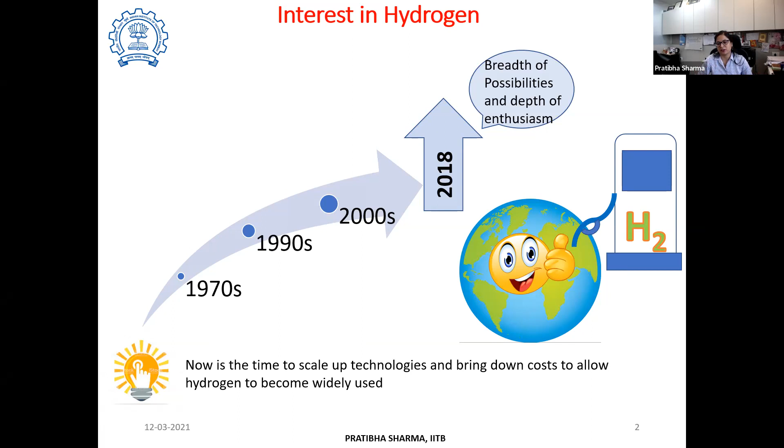Now, if we quickly see some of the major initiatives that are there, there are several roadmaps, strategy documents, mission documents which various countries are coming up with. And we know many of these, like Germany's world's first fuel cell train, this was in news, and now they are coming up with a few more trains.

China has a target of 1 million FCEVs by 2030 and 1,000 hydrogen refueling stations. They are planning to have a hydrogen energy industrial park with an area of 130,000 square meters. Japan has launched their hydrogen mobility program.

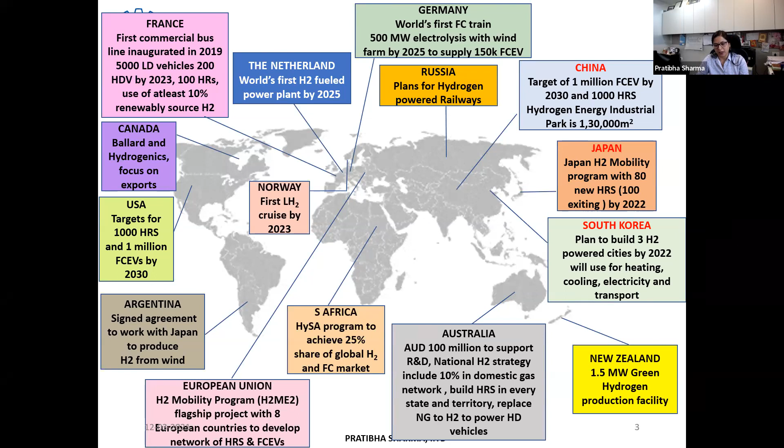Similarly, there are several countries, including India, who are coming up with their strategic documents. These documents have certain targets defined, considering that by 2050 or 2060, depending upon which country has announced which year they want to reach net zero target. All these factors are increasing that interest.

There are different countries which have their hydrogen missions, to name a few: Japan, China, US, Australia, Germany, France. They have all come up with a strategic document. There is the automotive industry, OEMs, various OEMs which have come up with various

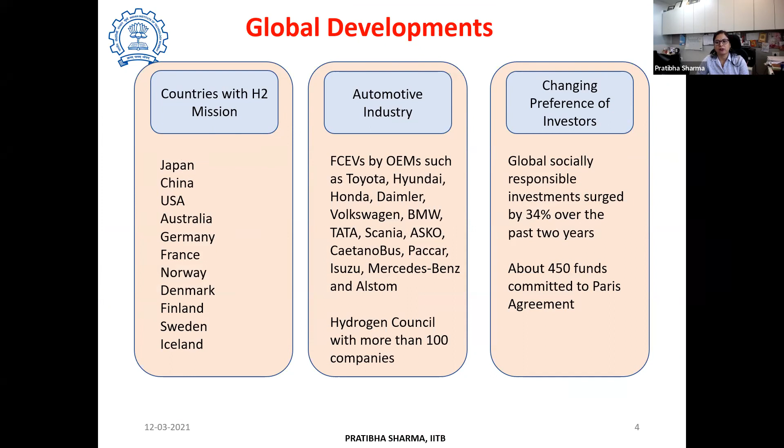prototypes, designs, various vehicles into the market. There are different councils which are formed where companies are partnering and bringing in funds. So there is an investor interest as well, which is coming up globally.

So if we see globally, there are incentives which are given so as to meet these targets. There are targets which have been launched without incentives, and then there are both. As well as there are incentives which are without targets. Depending upon the advancement scale of a hydrogen technology, these have been defined.

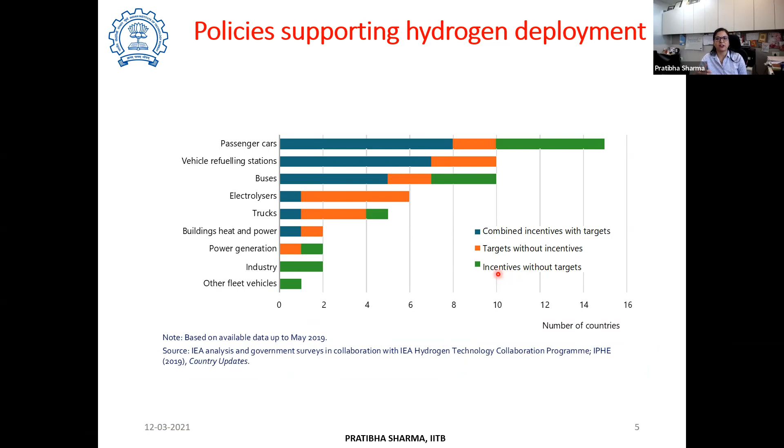Now let us first understand why this interest is coming globally for use of hydrogen. Some very simple things that we all know, I will just reiterate: hydrogen, since it is very abundant as against other fuels which we know will deplete at some point in time. But hydrogen, since it can be produced from a wide variety of fuels and sources, may sustain over a longer period of time.

At the same time, it has very high energy density. At the point of usage, it is clean and green. It even offers to decarbonize a wide variety of sectors, including the industrial sector, the transport sector, and polluting sectors like chemical, iron and steel, which are also opting for hydrogen, including a certain percentage of hydrogen in their usage so that they can reduce their carbon dioxide emissions.

Hydrogen is a versatile fuel, a versatile energy carrier, because we can use any source of energy to produce hydrogen. And that can help us with energy security.

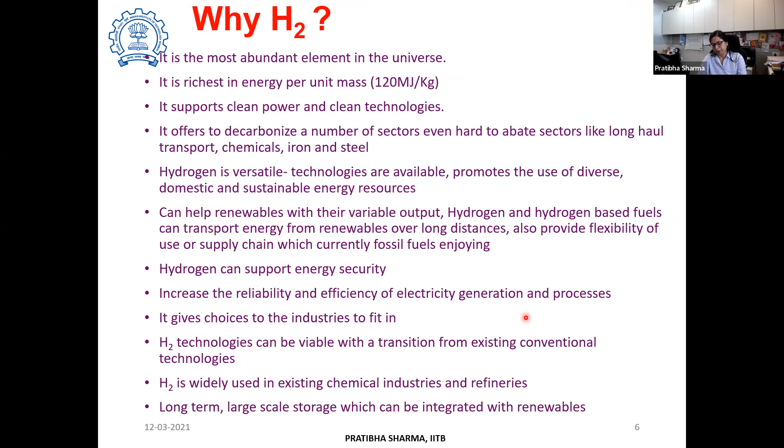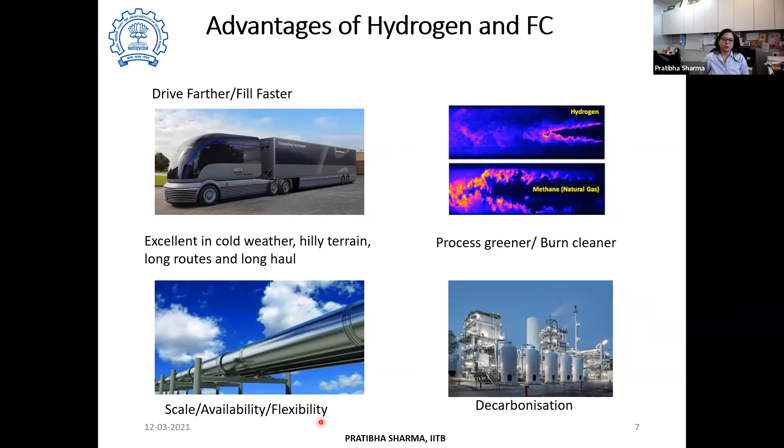When we use hydrogen, there are several advantages. In transportation, we can drive longer with hydrogen compared to battery electric vehicles, and filling could be faster. When used in different processes, whether combustion or burning, it is clean and green. We can scale it up easier compared to even battery systems. And when used, we can decarbonize several industrial sectors.

There are a wide number of applications where hydrogen can be used. It can be used for power generation, domestic applications, various industrial applications, vehicular application, navigation, and space applications. Many of these we have already been using.

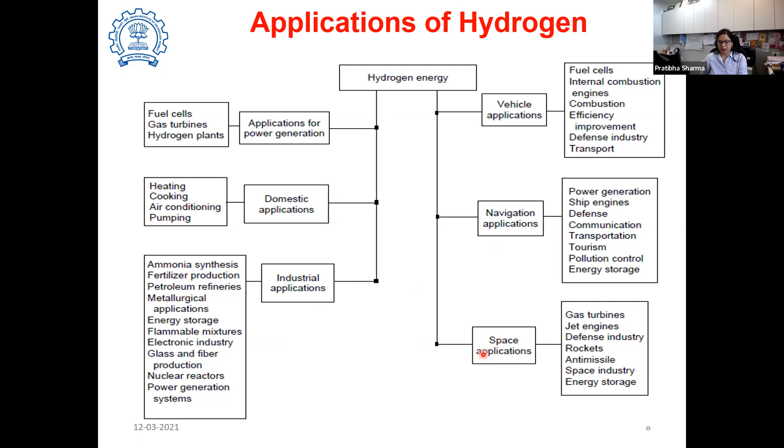Now let us come to the topic I will be discussing in this talk: the status of hydrogen production globally. About 90 million tons of hydrogen is being produced globally. Out of that, about 79%, 72 million tons, is produced in dedicated hydrogen production plants, meaning hydrogen is the primary product. The remaining 21%, 18 million tons, is obtained as a byproduct. An example of byproduct hydrogen is in the chlor-alkali industry, where electrolysis is done to produce NaOH and hydrogen is obtained as a byproduct.

Out of that 90 million tons, if we see from which fuel hydrogen is being produced, the dominating fuel is natural gas. Natural gas's major constituent is methane, but there can be other components like ethane, propane, butane, H2S, carbon dioxide, nitrogen, and other constituents as well.

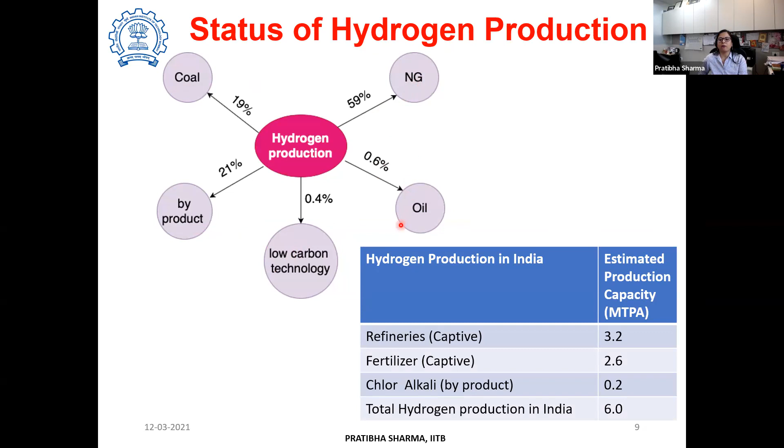Now, we have seen that hydrogen can be produced from different fuels. Based on which fuel it is produced from, there is a color coding assigned. Hydrogen itself has no color—it is colorless, odorless, tasteless gas. Just to identify from which feedstock hydrogen is being produced, a color has been assigned.

If produced from bituminous coal, it is black. If produced from lignite, it is brown, without CCUS. If produced from natural gas, it is gray. If produced from renewables, it is green. If produced from fossil fuels with carbon capture, use, and sequestration integrated, it is blue hydrogen. A new color, turquoise, is when hydrogen is produced from methane pyrolysis. There are several other colors coming up, whether produced from biomass or nuclear, but they have still not been finalized. So an entire spectrum of colors will soon come up.

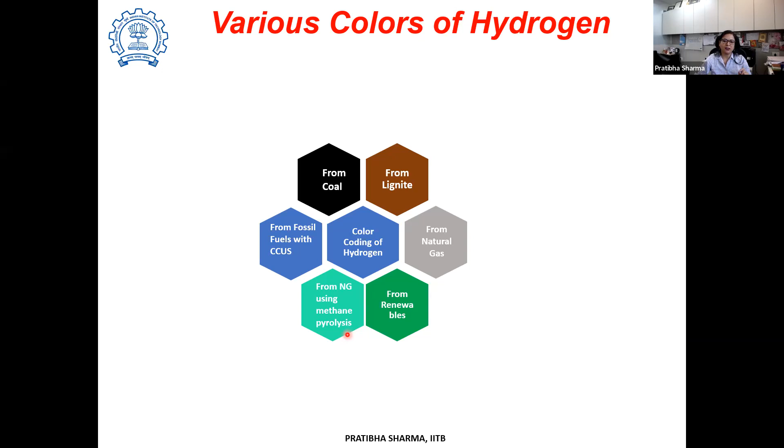So we will quickly see what are these methods, the ways in which we can produce hydrogen from these feedstocks.

As I mentioned, of the 90 million tons of hydrogen produced globally, 72 million tons is pure hydrogen and 18 million tons is mixed hydrogen. The 72 million tons of pure hydrogen is used for the fertilizer industry and refineries. The other 18 million tons is used for methanol production and DRI, direct reduction of iron, in the steel industry. So this is about the demand.

Now, why are we using fossil fuels for hydrogen production? There are very clear-cut reasons for it. Although we say hydrogen is a green energy carrier, we need to understand that if we are producing it from fossil fuels, we are still emitting emissions, and only at the utilization point is it clean and green.

But the scenario is changing, and now the focus is shifting towards green hydrogen, wherein we use renewables for production. So there will be a short term where we still depend upon fossil fuel, an intermediate term where both fossil fuel and greener hydrogen production from renewables take up, and finally, in the long term, it is expected to be from renewables only, or from fossil fuels with CCUS, so that the entire hydrogen value chain becomes clean and green.

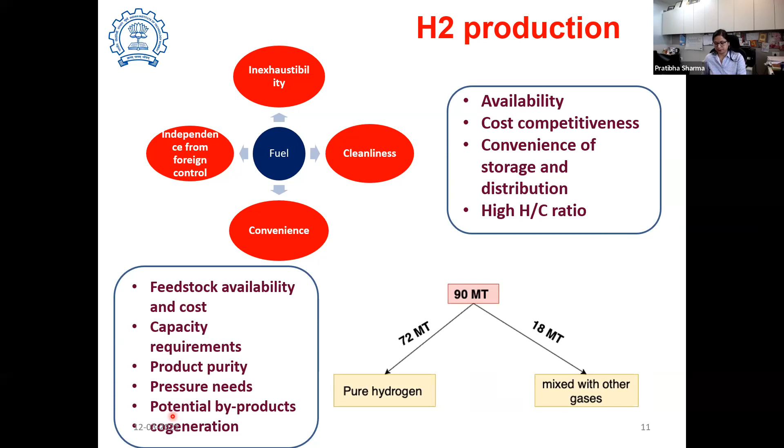Just to quickly again see what could be the reason why we are using fossil fuels. So this is the theoretical energy consumption in producing hydrogen from different feedstocks, if it is natural gas or LPG, naphtha, heavy oil, coal, and water. So we can see that by electrolysis, the requirement of energy is several times higher as compared to the energy required in producing hydrogen from fossil fuels.

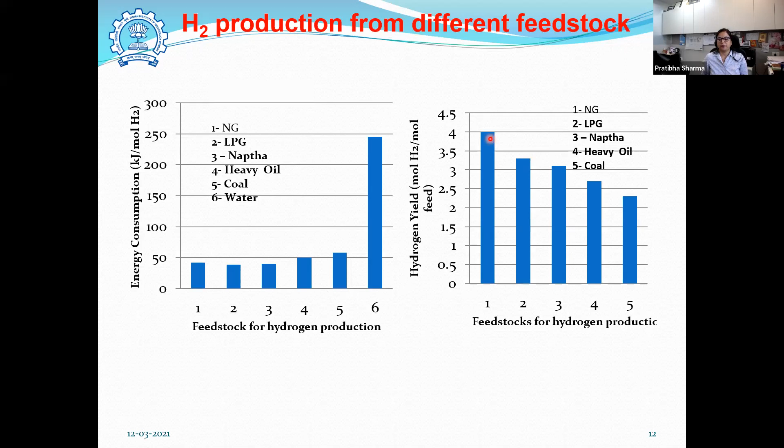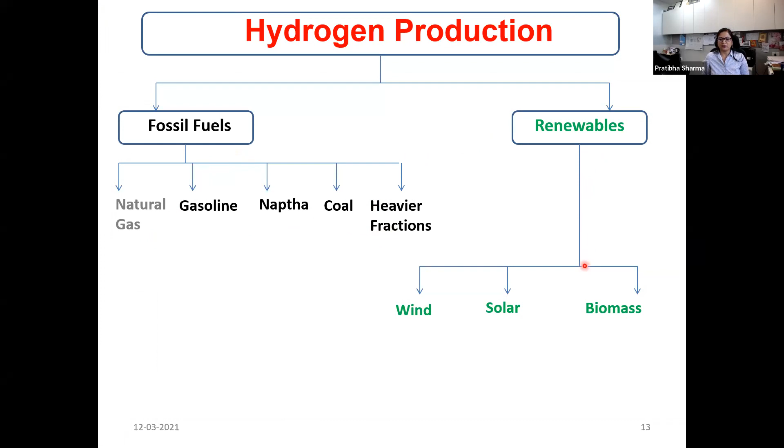At the same time, the hydrogen yield which we are going to get when it is being produced from natural gas as against the other hydrocarbons is much higher. And that is the reason globally why close to 60% of it is being produced from methane or natural gas. So we can produce this from fossil fuels, natural gas, gasoline, naphtha, coal, heavier fractions. We can even produce hydrogen from renewables. It can be wind, solar, biomass, nuclear.

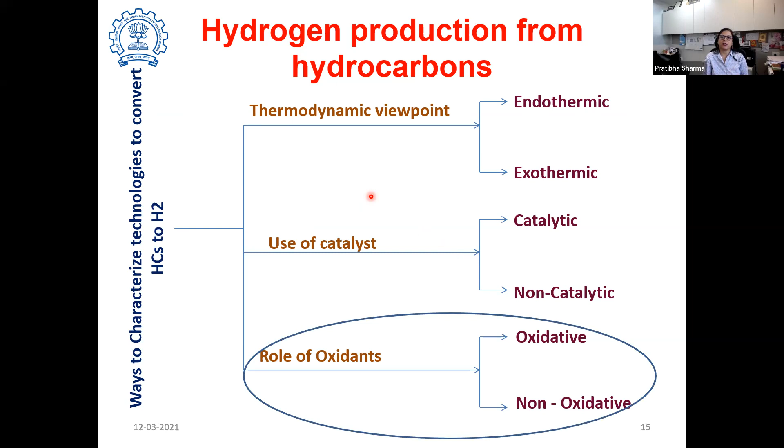Now, starting with the hydrogen production from various hydrocarbons, we can categorize the methods of hydrogen production from different hydrocarbons depending upon the thermodynamic viewpoint. It can be an endothermic reaction, exothermic reaction; on the basis of the catalyst, whether it is a catalytic reaction or non-catalytic reaction; whether it is oxidative, so we are using an oxidant in it or not, then it can be oxidative or non-oxidative. However, the major way of characterization of the different technologies for hydrogen production is based on the oxidant.

Again, there are a large number of ways of producing hydrogen. Oxidative can be further categorized into steam methane reforming, autothermal reforming, partial oxidation, and we can combine two of these methods to get a combined reforming, steam iron process, carbon dioxide reforming, plasma reforming, and similarly non-oxidative routes wherein we don't use oxidant. And these can be further classified. We will not be going into the details of it since this is a 1 hour talk. All this production we used to cover in a classroom course in 20 or more hours.

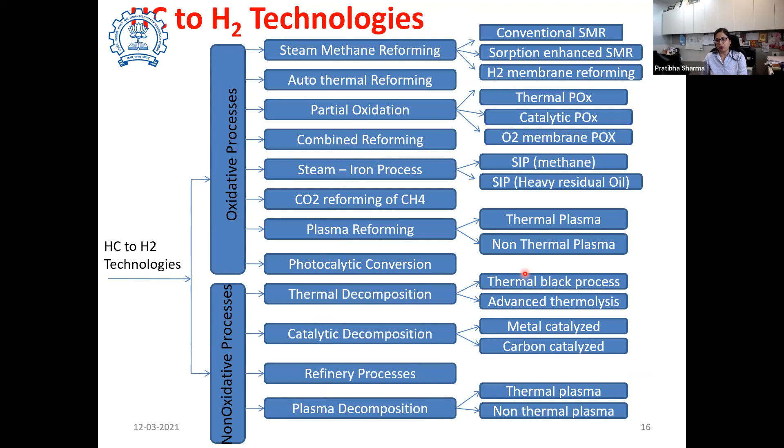So what is the difference between an oxidative process and a non-oxidative process? The name itself tells there is an oxidant present, then it is an oxidative process, and that oxidant reacts with the hydrocarbon to produce syngas. What is syngas? Synthetic gas, which is a mixture of carbon monoxide and hydrogen. Depending upon what is the hydrocarbon being used, we will get that ratio of hydrogen to carbon monoxide in the syngas. So when an oxidant is used, this oxidant reacts with the hydrocarbon to give syngas.

This oxidant can be oxygen. If it is oxygen, then it is an exothermic reaction, so it is an oxidation process. If steam is used, in that case, it is a reforming process. Or if it is carbon dioxide which is used as an oxidant, then it is known as dry reforming. So we can have either of these oxidants or a mixture of those. For example, if it is oxygen, then it is an exothermic reaction. If it is steam, it is an endothermic reaction. If it is carbon dioxide, it is again an endothermic reaction, or it can be a mixture like oxygen and steam, then it is a thermoneutral process. It can be oxygen and carbon dioxide. It can be three of these, so bi-reforming or tri-reforming.

But the problem is that since the hydrocarbon which we are using is inert, and if we are using steam, it is also an inert compound, operational temperatures required are higher. In order to bring down those operational temperatures to a lower temperature, we have to use a catalyst. So catalyst plays a dominant role here.

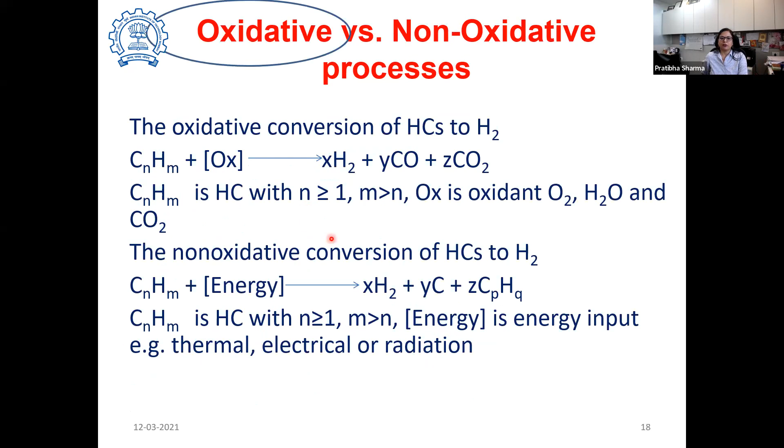So we will be looking at the oxidative processes first. The first and foremost method, as I mentioned, 59% is being produced from natural gas, and that process which is used for producing hydrogen is known as steam reforming. So it has certain steps. I will try to skip the chemistry which is involved in this. I will try to concentrate on what is the role of materials in each of these processes, because this is a workshop related to materials.

So just trying to give you a feel of the steps involved in a steam reforming process: the first and foremost step is you are preparing the raw material for it to participate in the reaction. And that is known as feed pre-treatment. So you are making ready the feedstock, which can be methane.

So the term is general, steam reforming. Now, if you are using methane, then it is steam methane reforming. If you are using ethane or alcohols or higher hydrocarbons, then it becomes steam reforming according to the feedstock used. Now, in this, the material is prepared, then it undergoes steam reforming process. This is the second step. Thereafter, it undergoes gas shift reaction, where we can still recover more hydrogen, and finally a purification step.

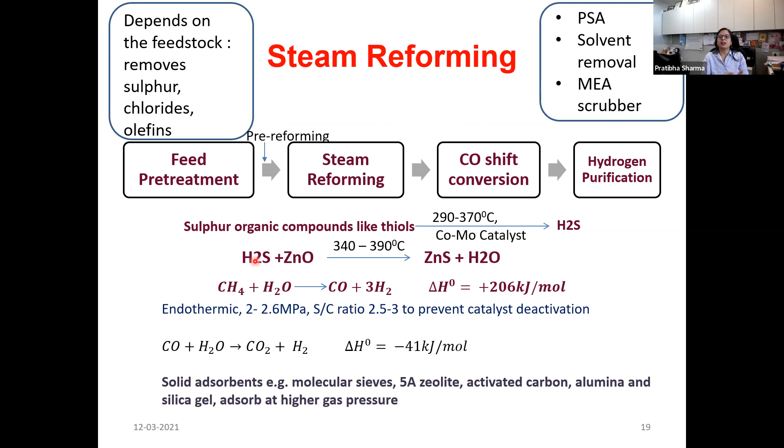Now these impurities can be sulfur containing impurities, these can be chlorine containing impurities. So there are different processes which are used for removing these impurities so that your feedstock gets ready. And usually in steam reforming process, whenever there is a higher hydrocarbon, it is converted into a lower hydrocarbon for the reforming process. Like if it is ethane, propane, butane, they are converted into methane. And finally, the reaction is steam methane reforming.

Now these tubes, just to give you a feel of the size of the reformer, have about 7.5 to 12.5 centimeter inner diameter, 2 centimeter thick, and the height of the tubes can be between 12 to 15 meters. And there are hundreds of such tubes in a reformer, which are filled with the catalyst. So once the feedstock is cleaned from the impurities, the natural gas along with steam is passed in these catalyst filled tubes, where the reforming reaction occurs.

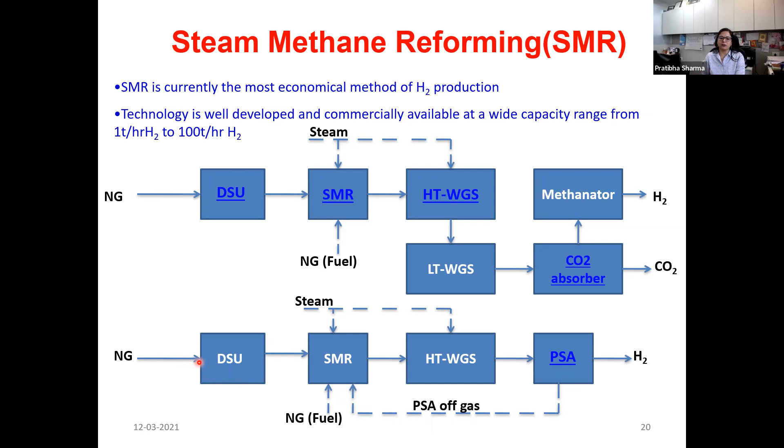The exit temperature is very high. For the remaining reaction, the temperature needs to be lower. That heat is taken out to produce steam. Once it is cleaned using a pressure swing adsorption, the remaining gas also has a calorific value that can be used for burning in the burner. So the natural gas here can act as both. It can be a feedstock for producing hydrogen. It can act as a fuel for burning in the burner to provide the required energy.

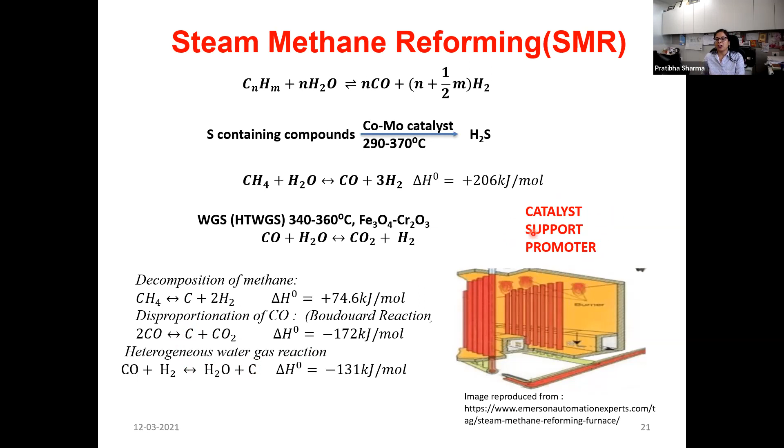Now the major challenge in a reformer is the carbon which is formed through several steps. So these are not the only steps. Depending upon the feedstock, whether it is a higher hydrocarbon, there can be several competing reactions that can occur in a reforming plant. Carbon can get deposited and we have to get rid of it. So the proper design of catalyst, support and promoter is very important. Usually, since large quantities of catalyst are used, it is nickel on alumina. Now when it comes to designing a reformer, it is not only the reformer heat transfer, but this entire system of catalyst, support and promoter plays a key role.

And then gas needs to be cleaned. So it has to undergo several cleaning steps in the final process so as to get very high purity hydrogen. Like we can even get 99.999% purity when we use a pressure swing adsorption. And there are several steps in the pressure swing adsorption, and there are different material layers. So again, material here plays a dominating role. So different layers of adsorbents are used in a pressure swing adsorption, which sequentially remove impurities from the hydrogen flow stream.

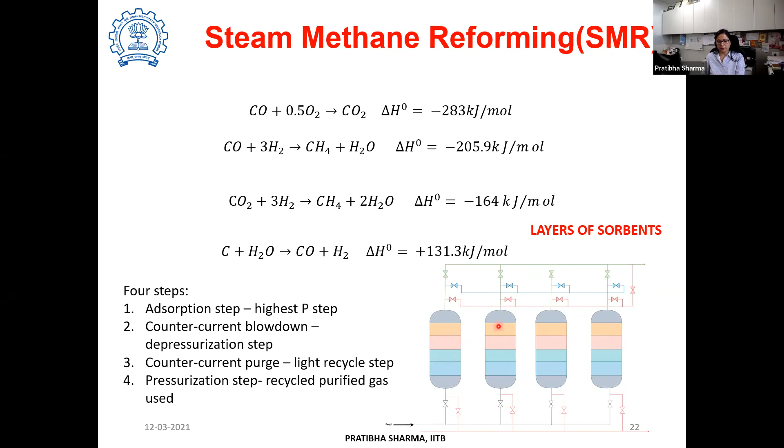So this is the major method which is used globally for hydrogen production. Now the major problem that lies, if we see from the thermodynamic viewpoint, is this reaction, which is the steam methane reforming reaction. There are 2 moles combining to form 4 moles. So there is a volume expansion, volume increase. So what is required is that the pressure should be lower. But for any industrial application, the desired output pressure from a reforming unit is higher. So how can we take care of it?

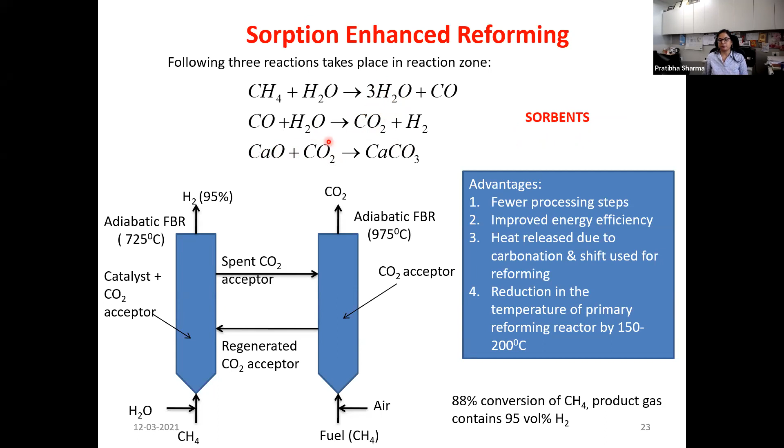There can be another way of looking at this problem of required pressure which is higher, and that can be membrane based separation, wherein we can use certain membranes to remove hydrogen selectively. And as such, the chemical equilibrium limitations will not be there. So we can have the catalytic bed where the reforming reaction will take place, producing hydrogen, carbon monoxide, and carbon dioxide. But then we have a membrane which will only allow hydrogen to flow through it. So we can have multiple processes taking place in a single reactor. And that is the advancement to steam methane reforming.

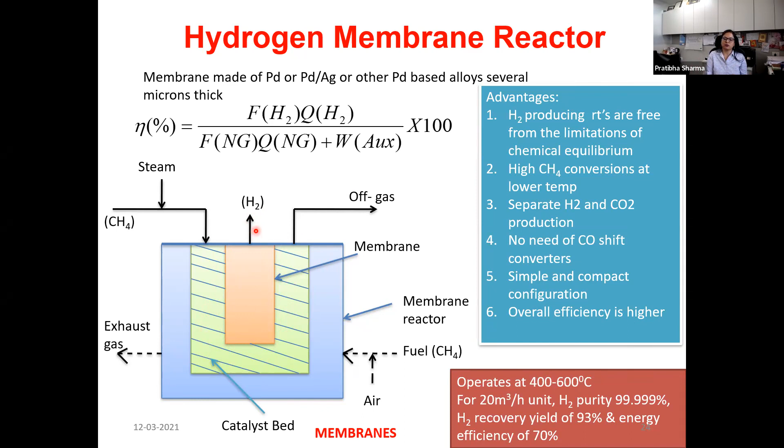Now, when we use steam methane reforming, definitely there are a lot of emissions involved. So about 900 million metric tons of carbon dioxide is released into the environment because of hydrogen production processes. And it's roughly around 10 tons of carbon dioxide per ton of hydrogen produced using natural gas. So what can be done is to reduce the emissions.

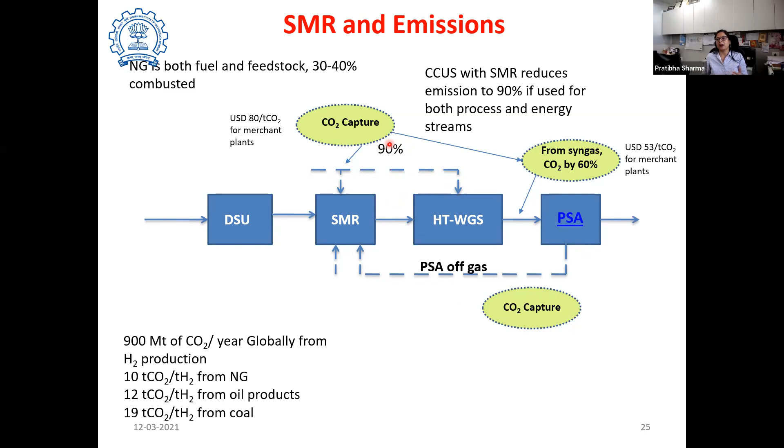We can collect the carbon dioxide which is produced, not only from the off gas. What do we mean by off gas? Once you are separating hydrogen, whatever is left out is known as an off gas or tail gas. When it is used as a fuel in the burner, the carbon dioxide which is released is in a diluted form. If we capture from there, and if we capture the emissions related to the formation of hydrogen, we can capture 90% of the carbon dioxide, and that could be a sustainable method of hydrogen production, but that adds up to the cost.

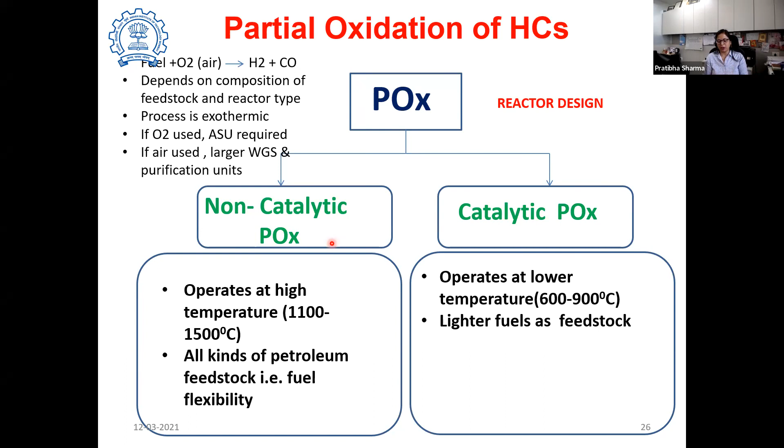Now, another method could be a simple one: oxidize the fuel and then produce hydrogen and carbon monoxide. That is the syngas. Again, it can be catalytic and non-catalytic. Usually non-catalytic is used. The reason for partial oxidation of hydrocarbons is in refineries, which were earlier considered a major producer of hydrogen, but now have become major consumers of hydrogen because they use hydrogen for various downstream processes, whether it is catalytic cracking, hydrogenation, hydrodesulfurization, denitrogenation. And at the same time, they have a heavier, dirtier feedstock, which has a lot of impurities, heavy metals, heavier hydrocarbons. So they can upgrade the fuel using partial oxidation and can produce hydrogen. So the bottom of the barrel, the fuel which as such will go waste, can be used in partial oxidation.

Now again, the challenge that remains is, since the reaction takes place at very high temperatures, even the burner temperature can go to 3000 degrees centigrade. So the material constraints are there. So again, the materials design and the burner design play a key role. We will not go into the chemistry of the reaction. So partial oxidation is a method which accounts for upgradation of fuel in refineries. The fuel which they cannot use, neither can they throw because it has certain calorific value, they can upgrade using partial oxidation.

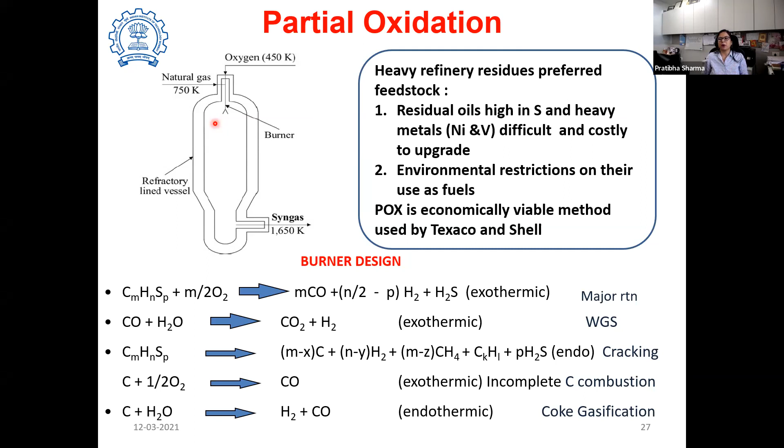A mix of the two processes, reforming and partial oxidation, which takes advantage of each of the two methods, is autothermal reforming, where we are using both the oxidants, oxygen and steam. And that has the advantage that the required energy for reaction is not provided by an external source by heating the tubes of the burner in the reformer, but we can still get a higher hydrogen concentration, unlike in partial oxidation. So both advantages are taken into consideration using an autothermal reformer.

Again, materials play a dominating role. What will be the tube metallurgy? What will be the metallurgy of the reactor? What will be the design of the burner? What will it be made up of? All that decides what will be the efficiency of the process.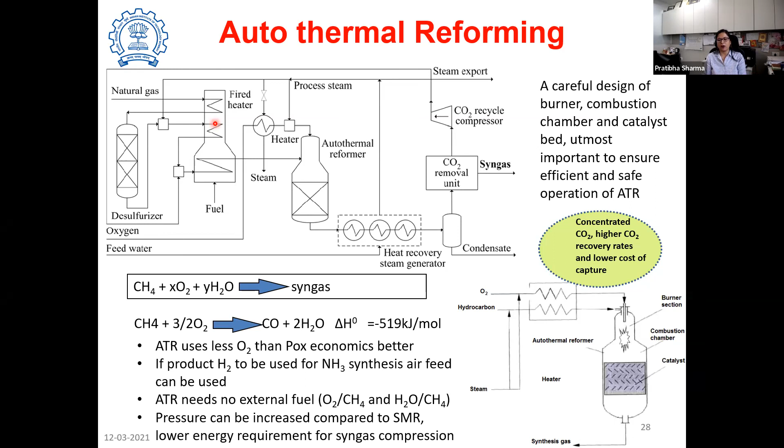Hydrogen can also be produced using coal gasification. Coal, we have seen, is a major process producing 19% of hydrogen globally. And it is a very simple step. We will not go into the chemistry. It is a water splitting reaction, wherein you have a species M, which fixes the oxygen present in water, and hydrogen is produced. So this is a reduction oxidation reaction.

Now this M can be carbon in the coal. It can be some other metal. So metal oxide based reduction oxidation reaction. Now when such a reaction occurs, it can be in the presence of oxygen, in the presence of steam, it can be pyrolysis, gasification, or oxy-steam gasification. So there are different routes. But since the carbon content is higher compared to the hydrogen content in coal, the H2/CO ratio in the product gas is much lower compared to the methods we have previously seen.

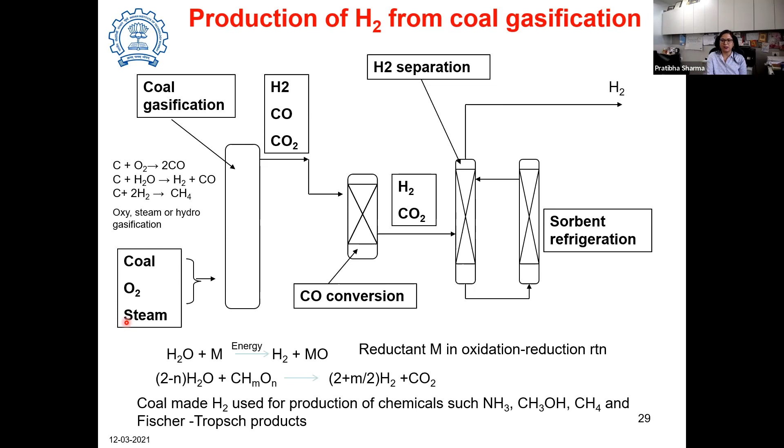Just to give a brief overview of the current status. Globally, about 130 coal gasification plants are in operation, and the majority are in China. They have about 80 coal gasifiers that produce 8 million tons of hydrogen per year, roughly equivalent to 12% of global dedicated hydrogen production. It results in a lot of emissions, so we should ideally always have carbon capture, use and sequestration, but that adds to the cost.

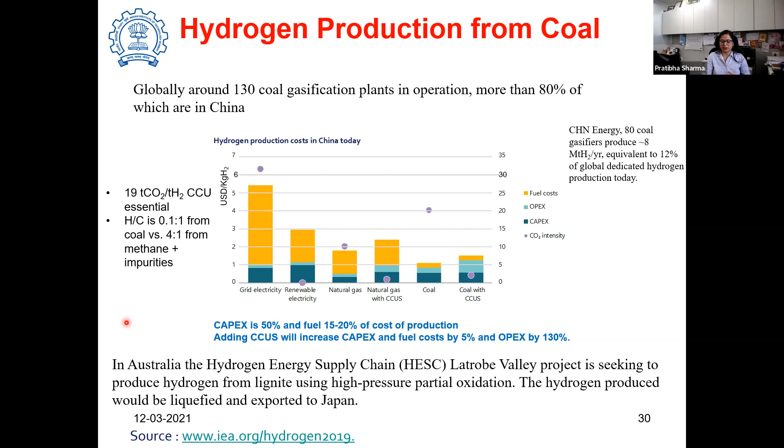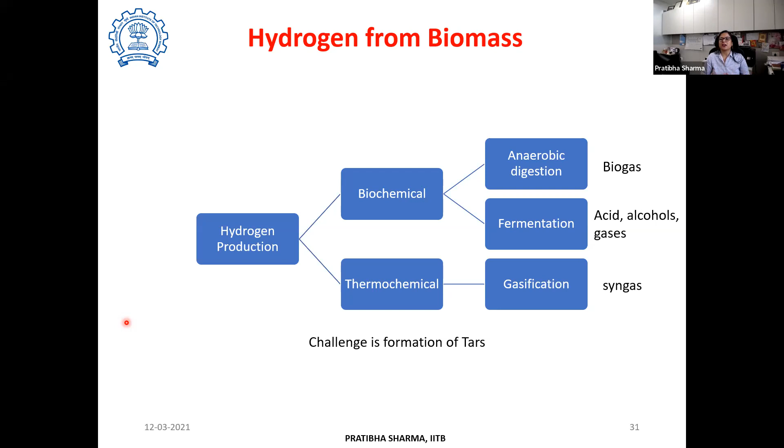Hydrogen can be produced from renewables as well. It can be produced from biomass. The route could be either biochemical or thermochemical. If it is biochemical, it could be digestion or fermentation producing biogas, acids, alcohols, and different gases. If it is thermochemical, it can be gasification producing syngas, which can be purified to get hydrogen, with carbon monoxide and carbon dioxide separated. But the biggest challenge in biomass-based production is the formation of tars.

Hydrogen can be produced, as I mentioned during the color code, by a method that is not new in fact; it was used in the 1960s and was known as the carbon black method. It was used for producing carbon, and hydrogen was a byproduct, but now that interest has come back. When you break down a hydrocarbon, you get solid carbon and hydrogen, so it is very easy to separate. Separating hydrogen from carbon monoxide and carbon dioxide, all gases, is difficult compared to separating it from a solid product, which, because of the density and phase difference, can be easily separated.

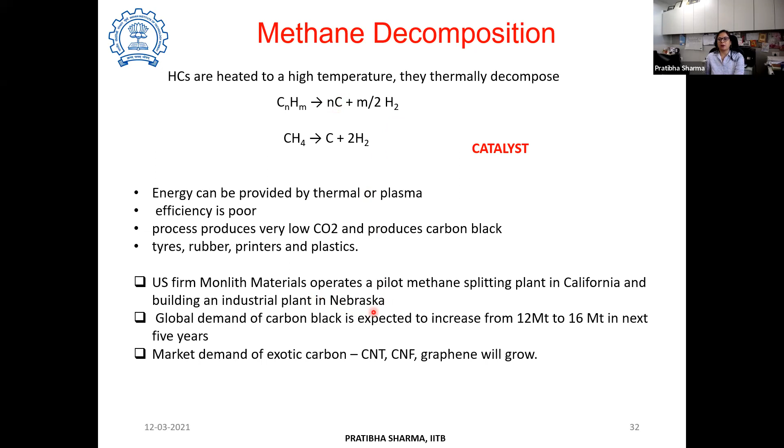At the same time, since carbon dioxide and carbon monoxide are not formed, emissions will be less. Other than that, the carbon obtained, depending upon the conditions, can be exotic forms of carbon, nanotubes and so on, which can be used for various energy storage applications. So both products, carbon and hydrogen, have their use in this process. And several plants are coming up based on methane decomposition.

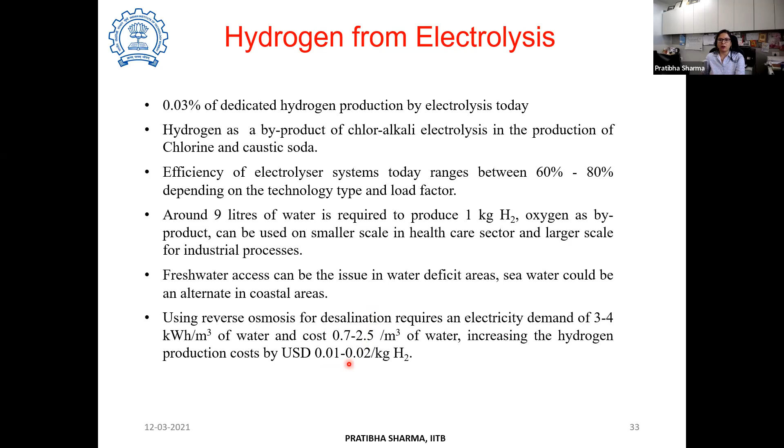Now, towards renewables, it can be produced from electrolysis. Roughly about 0.03% of hydrogen is currently produced globally from electrolysis, and a certain part of it comes as a byproduct in the chloralkali industry. Now, the problem people used to foresee is where this water will come from. So there are plants coming up where seawater can be used through a desalination route, but that adds a very nominal cost to the hydrogen. So that is another way of utilizing water for electrolysis.

Now, as all of you know, in the electrolysis process, when you give water a certain amount of energy, it breaks down into its constituents, hydrogen and oxygen. If this energy comes from electrical energy input, it is electrolysis. If it comes from heating, the thermal route, it is thermolysis, but the temperatures required are above 4000 K because it is a non-spontaneous process. Or it can come from combined chemical and thermal routes; those are known as thermochemical processes. So we will quickly look at the electrolysis route.

When we talk about an electrolytic cell, which is the basic unit of an electrolyzer, the device which is used for doing electrolysis of water to produce hydrogen and oxygen has a stack of different electrolytic cells. A basic electrolytic cell has a few components. There are two electrodes which are used. There is a separator or diaphragm, and then electrolyte.

Now, depending upon which electrolyte is being used, the technologies are different. If it is an aqueous solution of KOH, then it is alkaline electrolysis. If it is an acidic electrolysis with a membrane as a separator, then it is polymer electrolyte membrane. If it is a membrane or a diaphragm having oxide conduction, O2- ions conducting through it, then it is solid oxide electrolysis. And now there is a recent technology which is coming up, which is anion exchange membrane, a membrane which allows OH- ions to flow through it. So depending on what electrolyte we are using, the technology could be different.

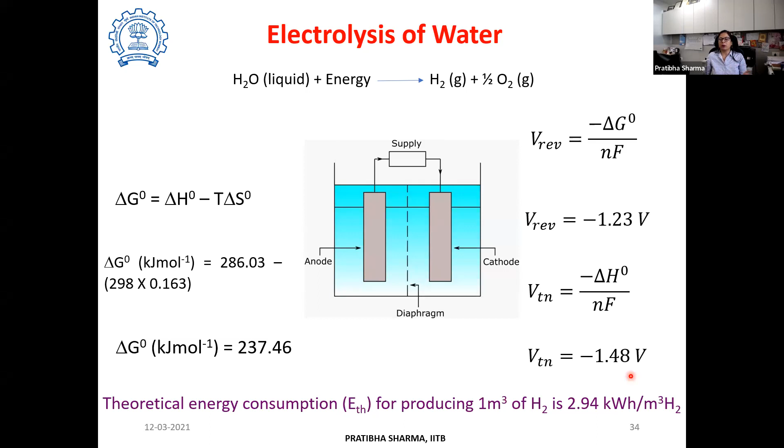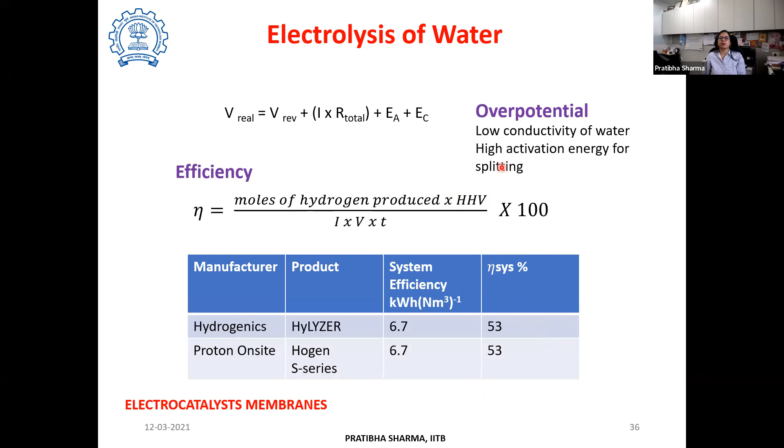So roughly we require actually 1.23 electron volt theoretically if water is being present in the vapor form. However, if it is present in liquid form, we may require 1.48 volt. But in actual conditions, the electrolysis occurs when the voltage to be delivered is 1.8 to 2.06 volt. There are certain extra voltages which are required for electrolysis, and they arise because of the various losses and irreversibilities present in the system as against the theoretical system.

So we can have an alkaline electrolyte, which could be KOH, and this diaphragm which allows selectively OH- ions to flow through it. So on the cathode side, the water takes up 2 electrons to produce hydrogen and OH- ions. OH- ions move across the diaphragm onto the anode side, undergoing recombination to produce oxygen. So oxygen evolution is always at the anode side. Hydrogen evolution occurs at the cathode side. 2 electrons which are liberated can pass through the external circuit. This is a very basic reaction for an alkaline electrolyzer.

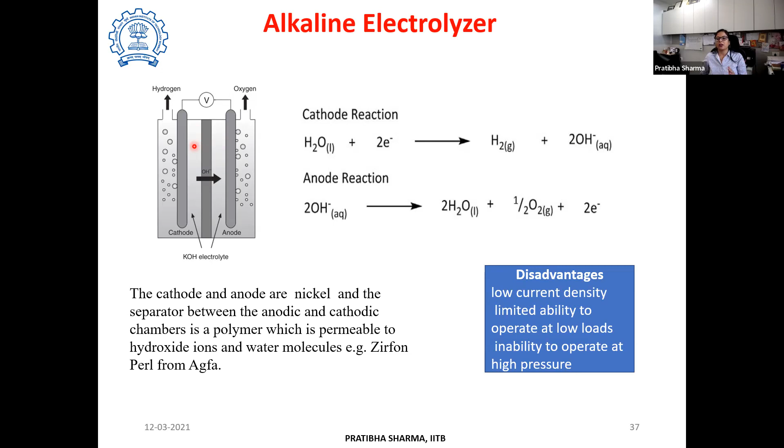But the problem associated with alkaline electrolyzer is we are using a porous diaphragm. So there is a limitation to the current density. There can be intermixing of the gases at a higher current density, and their response towards any load variation or current variation is relatively slower. So the other method, where these disadvantages are taken into consideration, is the polymer exchange membrane electrolysis or proton exchange membrane electrolysis or polymer electrolyte membrane electrolysis, where you use a membrane instead of a diaphragm or separator. And that membrane allows H+ ions to flow through it. So similar reactions will occur.

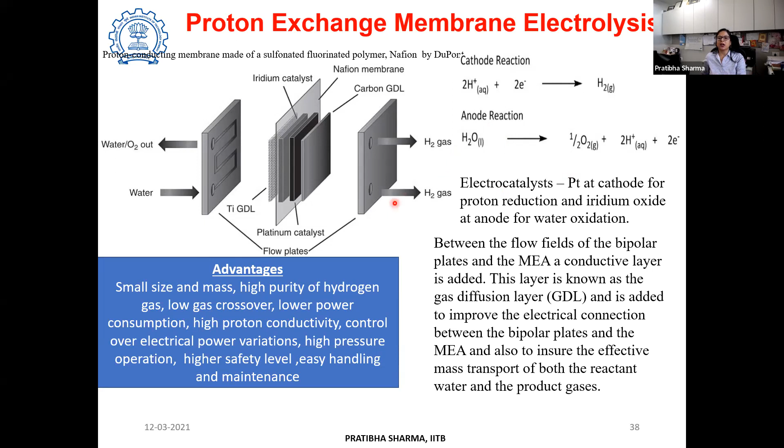Again, the major challenges when it comes to electrolysis are the electrocatalyst, because in case of proton exchange membrane electrolysis, we are using an acidic electrolyte. So the corrosion is a major problem. As such, we will have to use expensive metals, the noble metals, and that adds up to the cost. The membrane, which is the Nafion membrane, is expensive. So the challenge in terms of materials when it comes to electrolysis is the availability of membrane and electrocatalyst, and that can reduce the cost. Now, not only these components, there are several other components like the gas diffusion layers, bipolar plates. So all those are an integral part of a proton exchange membrane electrolysis.

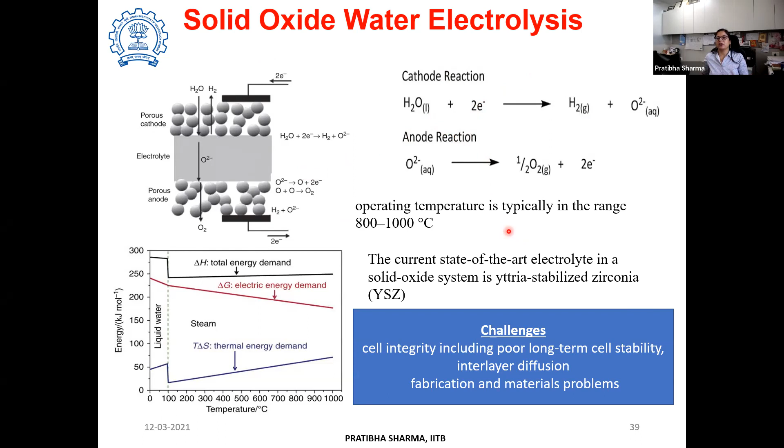A high temperature electrolysis can also occur where steam is used instead of water, and the total energy which is required for electrolysis, partly it can be thermal energy and partly it can be electrical energy. If the thermal energy input is higher, then the required electrical energy input is comparatively lower, and that happens in solid oxide electrolysis. So it takes place at a higher temperature. That high temperature can come from either waste heat, or from a nuclear power plant, or from a solar thermal plant. But the problem here lies in the oxide conduction. Since the temperature is higher, there are materials challenges; degradation of the material occurs. We want better materials so as to have a better efficiency and life.

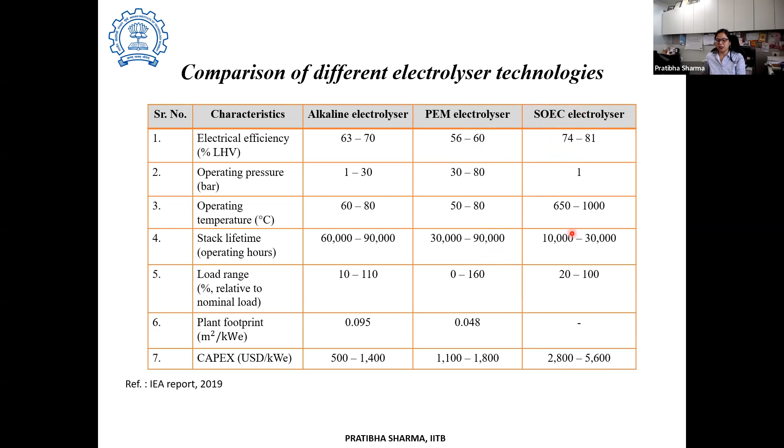We can compare each of these technologies. One technology has an advantage that it has a lower cost. Other technology, PEM, has higher current densities. These are more compact but expensive. SOEC, the requirement of electrical energy is less, so energy efficient, but then still there are degradations associated.

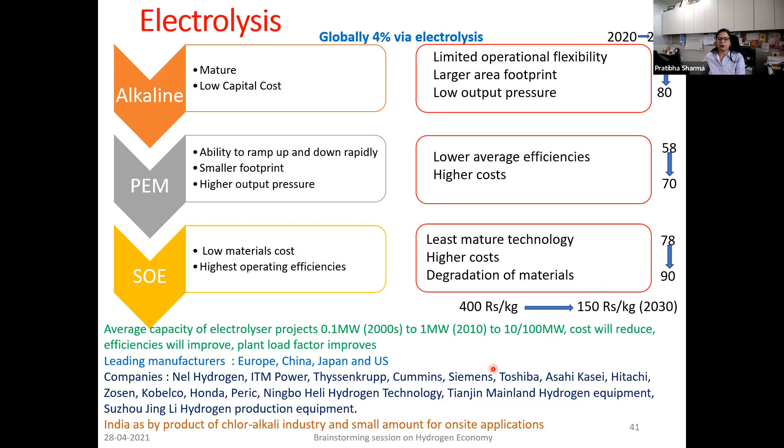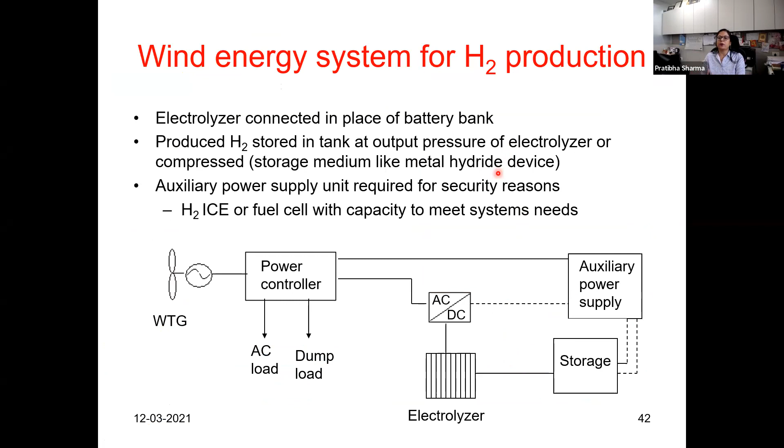Till the 2000s, we were talking about electrolyzer projects where the size used to be 0.1 megawatt. By 2010, we started talking about projects of 1 megawatt. Currently, projects coming up globally are in the size of hundreds of megawatts, even a gigawatt. There are various leading manufacturers now coming up for electrolyzer manufacturing. These electrolyzers can be combined with solar photovoltaic or wind energy systems to produce hydrogen, making the complete hydrogen value chain clean and green.

If we compare, the cost of producing hydrogen is still lowest when produced from fossil fuels, and that's why the majority of production is currently from fossil fuels. Production from renewables, using renewable power for electrolysis, is still the most cost-intensive method.

However, the scenario will change. That is the projection. In the net zero scenario, as well as in the long term, what is expected is that with increased renewables deployment, the renewable power price will come down, which is substantially lower in India compared to the developed world. The price of power, in electrolysis or renewables-based hydrogen production, accounts for 50% to 90% of the cost of hydrogen.

Once power cost comes down, renewable deployment increases, electrolyzer capacities increase, and economies of scale work well. Once we have scaled up these plants and gained knowledge of operating them to improve efficiency and reduce material costs, all that will in future bring down the cost of producing hydrogen from renewables. That is the forecast in various country pledges and net zero policies coming up globally.

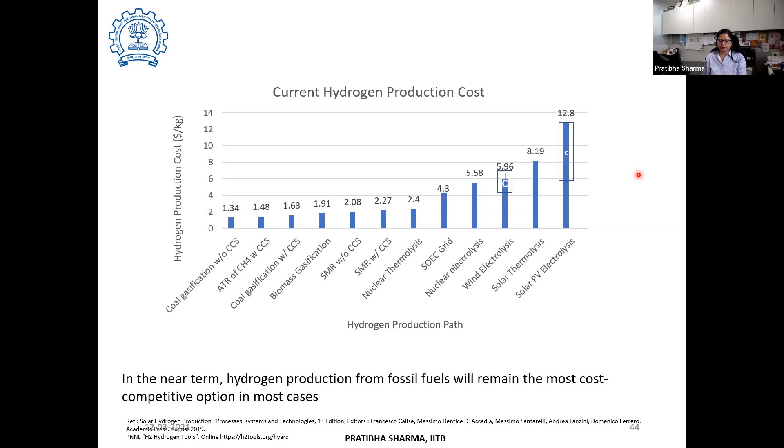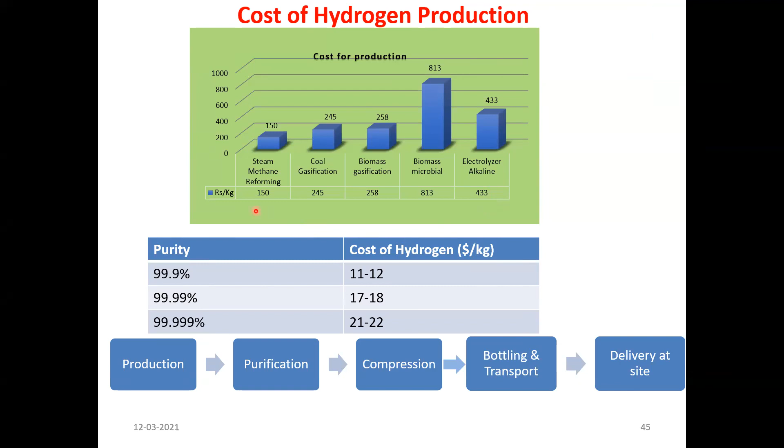We have to understand that electrolysis is the only route producing pure hydrogen, to the grade of 99.999%. The rest of the methods, even biomass gasification, produce other impurities or contaminants, depending on the initial feedstock, raw material used, and production technology, because you are using an oxidant which reacts to produce various carbon emissions, CO, CO2. That separation and purification of hydrogen to get pure hydrogen also adds to the cost.

Even at times, 40 to 50% of the cost of hydrogen comes from separation and purification - capital expenditure and operating expenditure. Including that, if we try to get a feel of it - if we have hydrogen at 99.9% purity, the cost may be $11 to $12 per kg. If it goes one more 9%, the cost increase is tremendous.

That purification and separation cost also adds up. The fuel cost adds up. If it is from renewables, then the electricity price adds up. So there are several components associated with it.

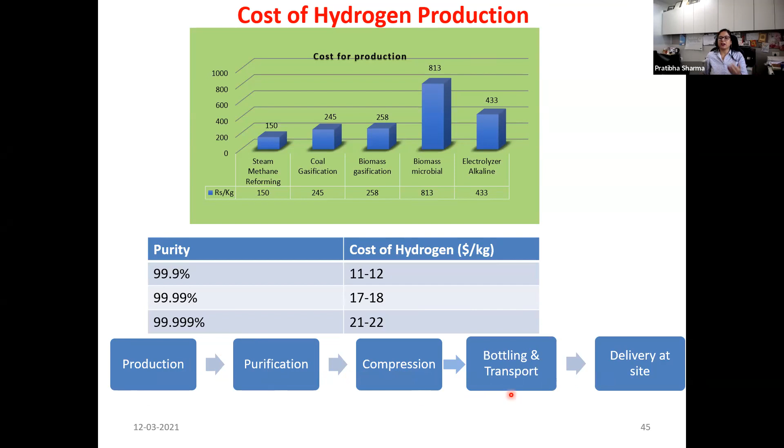So thanks, I gave a very brief overview because there is much more to be discussed in each of these technologies that I have just touched upon. Thank you.